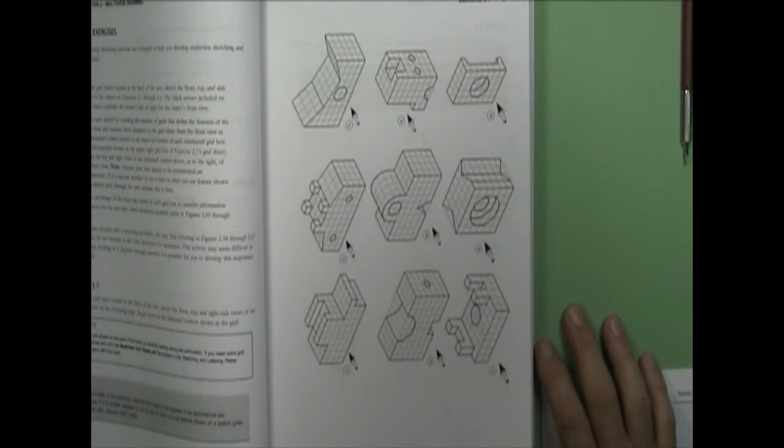Here in the textbook, we're starting exercise 2.1 on page 59, and if you look at these, you've got isometric drawings. The arrowhead tells you the front view. Most of the time, not always, but most of the time, this left face is going to be the front view of our object. It's broken down into grids that correspond to your drawing.

The main warning about the sizes of the grids is when you have an oblique surface, even though it shows 3 grids coming down, those grids are longer than these grids. Okay, they match up here, so you can't just count 3 grids down and then try to angle 3 grids. It's not going to work. You have to count horizontally and vertically to determine the start and the stop point of an angled line when it's in isometric.

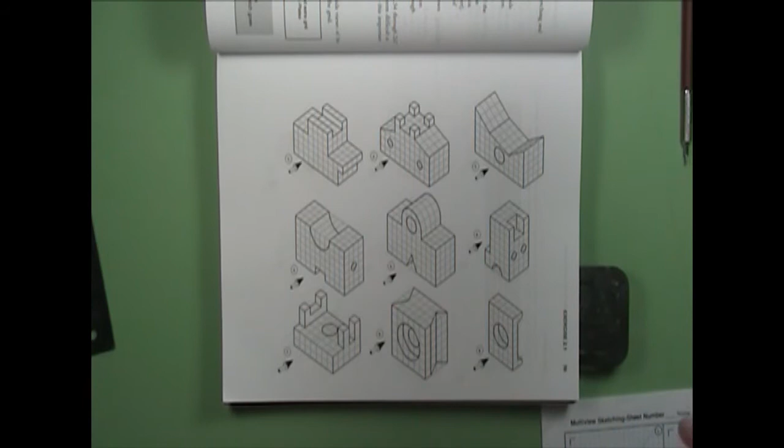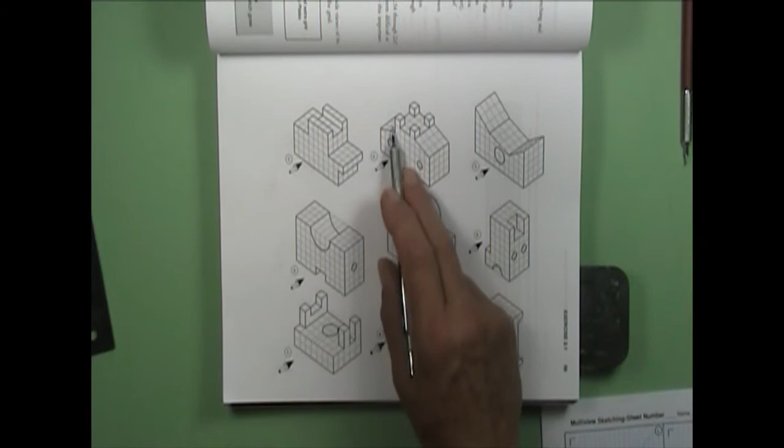Another thing that the book tells you in the little gray box right over here, if it appears symmetrical, assume that it is symmetrical. Okay, like this one here. If we count the blocks, we got 3 to the left of the arc, 3 to the right of the arc, 4 to the left of the notch, 4 to the right of the notch. Okay, symmetrical. This one, however, is not, because this sloped surface here is 4 grids up, whereas this sloped surface is only 3 squares up. Okay, so do some counting and some investigation, and then if it appears symmetrical, it is.

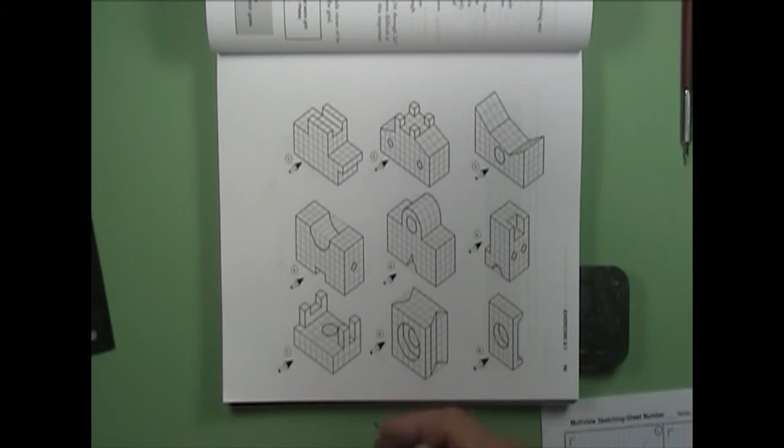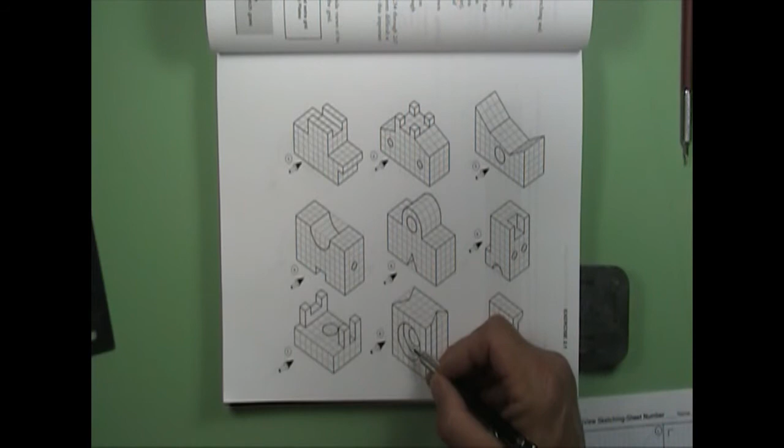If a hole appears to go all the way through, assume that it goes all the way through. Okay, this one is obvious. We've got a front surface and a rear surface. These are not so obvious, but assume that they go all the way through. This one goes through. The one here, this is what we would call a counter bore, in which we have a larger diameter hole that has a depth, and then a smaller diameter hole that goes the rest of the way through.

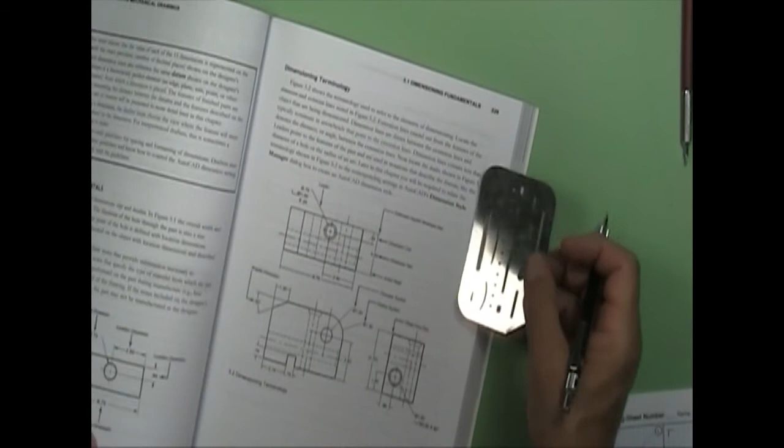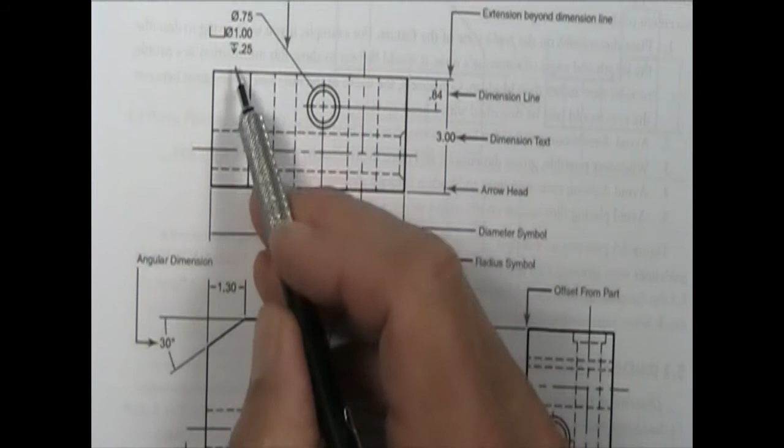If you will flip your book over, page 229, and let me zoom down on that a little bit, okay? Here we have a counter bore hole with the dimensionings here, and the way the dimensions are is the first diameter is the smaller hole that goes all the way through. The second has a counter bore symbol with a diameter, and then a depth for the counter bore. Okay, so this is in plan view looking straight into the hole.

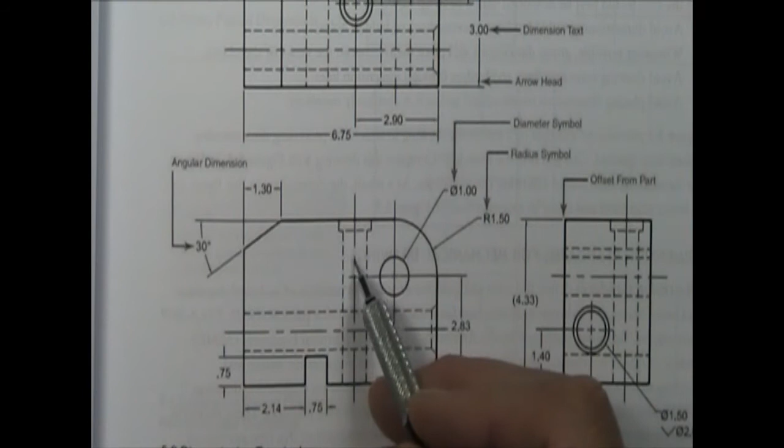If we go to the side view, in this case the front view, in which we see the profile of it, here's our counter bore. It has a diameter of 1 and a depth of 0.25. And then the 0.75 hole goes all the way through. I'm showing you this so you'll understand how the hidden lines should appear. Okay, these hidden lines here will join because those surfaces join in the object. And you got your hidden lines that come down. These do not go all the way up, and these do not go all the way down.

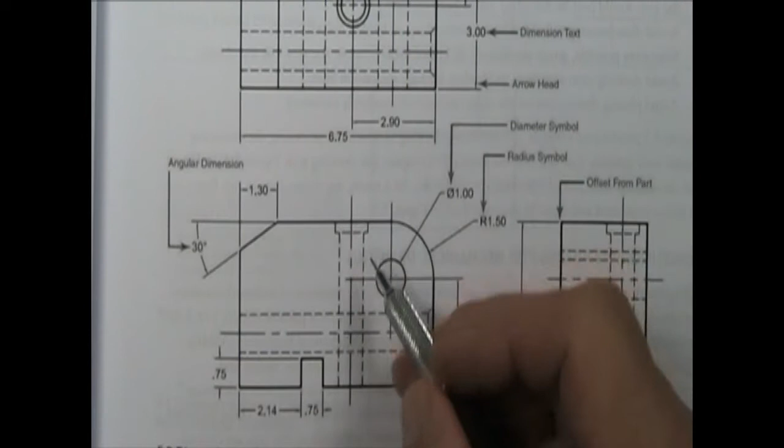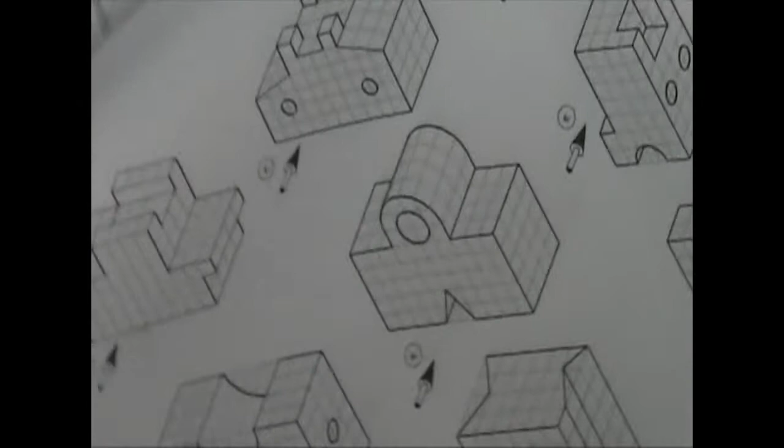So look at the example on page 229 right here for drawing the counter bore. Now don't be confused, because this one is a countersink in which the sides of the hole are angled so that a flathead screw can go into that hole or something along those lines. Okay, so let's go back over here and look. I'll walk you through this one to kind of get you started.

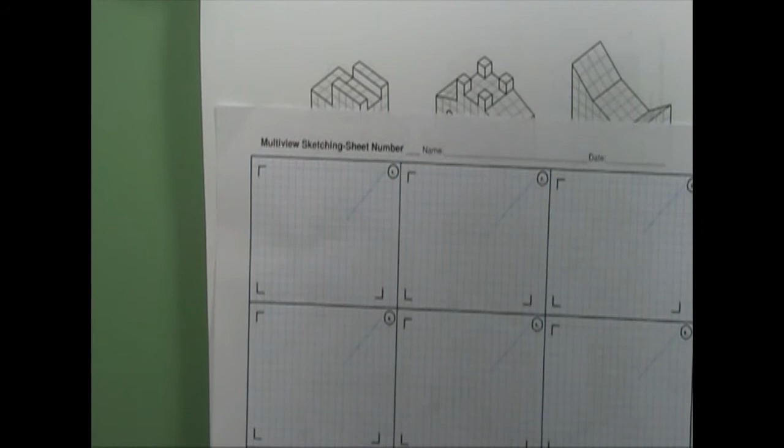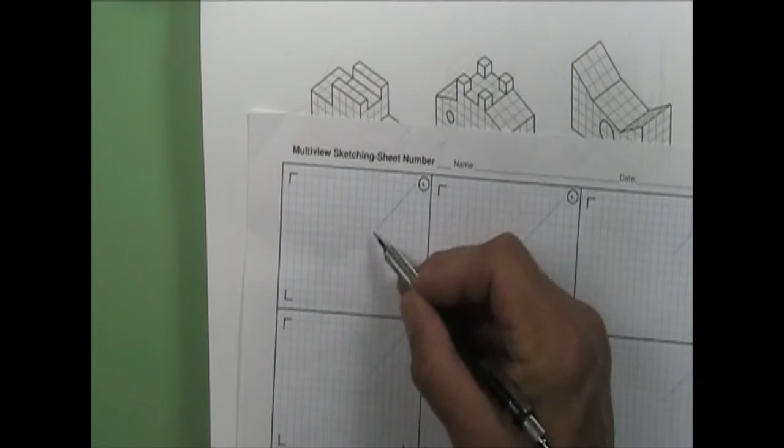Here's your paper that you'll be using, and there's copies of it in the lab. You don't have to tear it out of your book, but it's giving you the starting points for your views. So here's the lower left corner of my front view, upper left corner of my top view, lower right corner of my right side view, and then a 45-degree projection line. Okay, now I would recommend start with a light pencil and then come back in and darken afterwards.

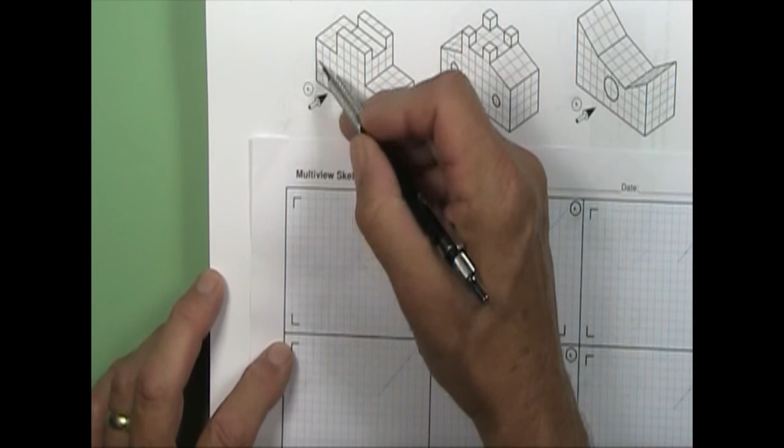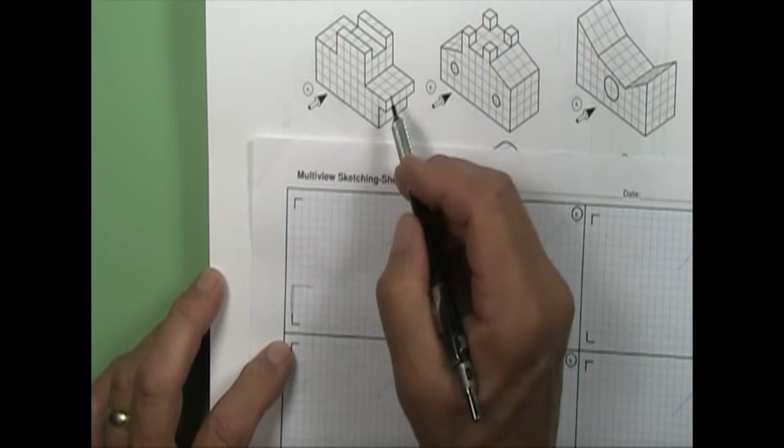But if we look at this, basically you're going to count your squares. And that comes in 3, 4, 5, 6, 7, 8, 9, and then goes up.

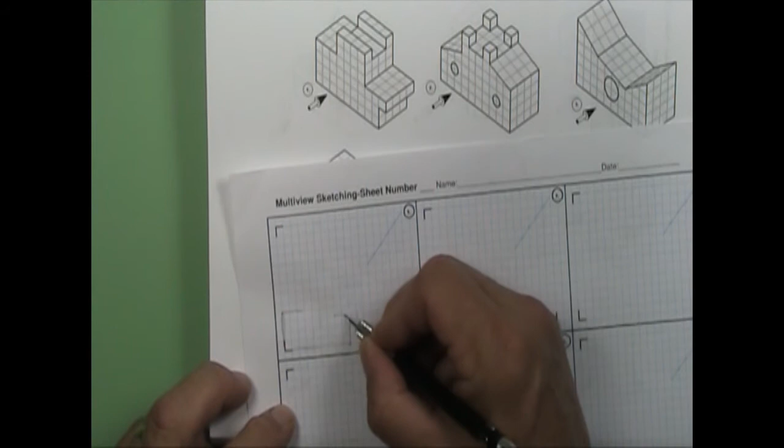It goes up 2, over 1, up 1, back 3, up 3, over 4, back down to there. Okay, so I just roughed in my front view.

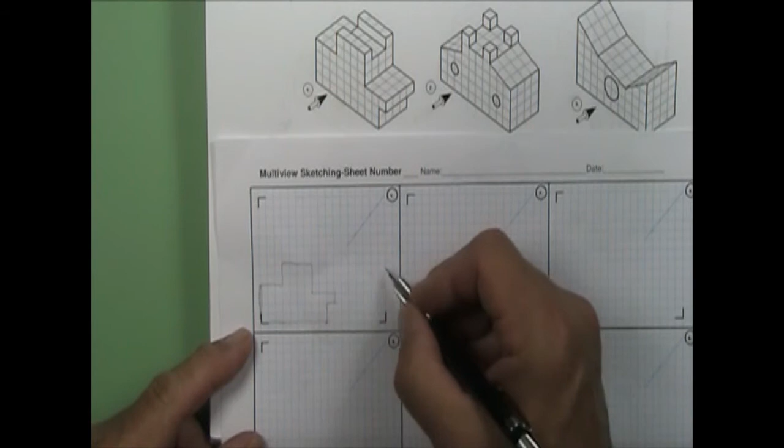If I can take these things and project them over for my side view. So I know I've got a height up here, if I'm looking in this direction for the side view. And you've got to remember, when you're looking straight at the object, all you're seeing are these three planes, and they're stacked on top of each other. You know, if you imagine turning it and looking straight at it. So that's 4 wide.

I know this height comes clear, so I've got a surface right here, so I know I've got a line that comes across. And then I've got this surface, which has a notch taken out of the top of it. Okay, so there's my side view.

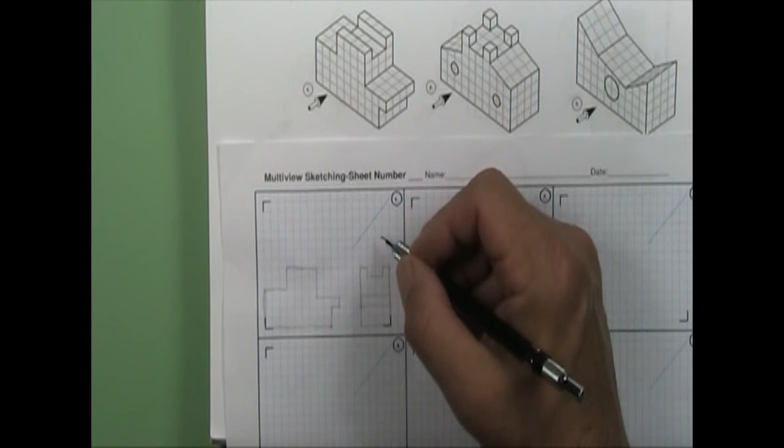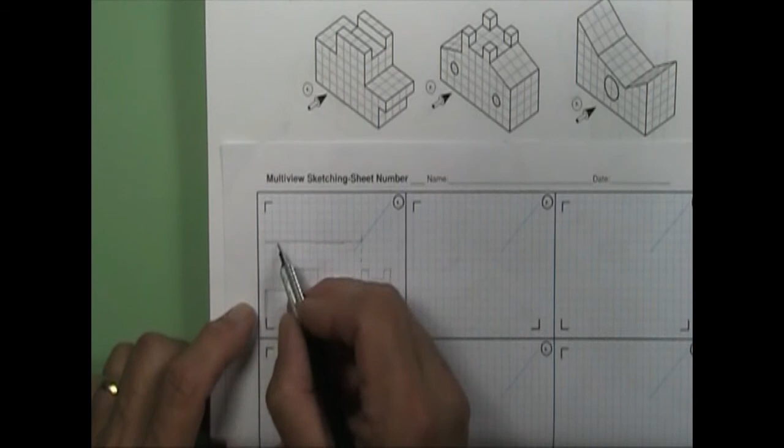If I use my projection lines, and we'll do this sometimes in CAD, and we'll do it in hand drawings later in the semester when you get to using the drawing boards, you just take this and you kind of project up, and then you project across. And so that tells me the edge of my top view is here. So that's the front surface of my top view.

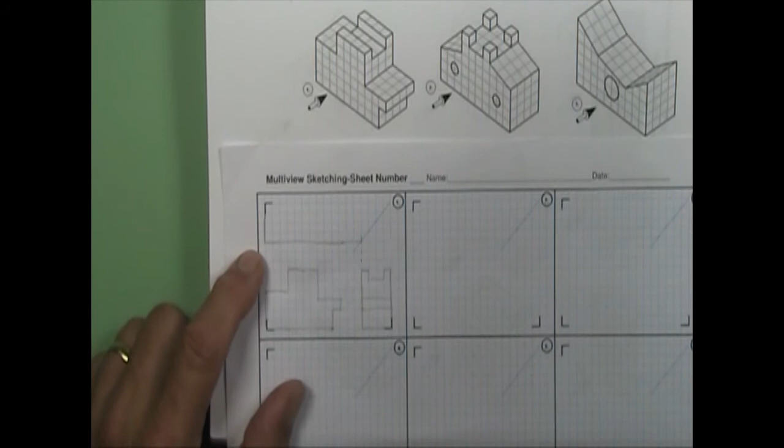Well, you know, if I'm counting, I can count squares, yeah. But anytime you have to measure in a drawing, you're introducing a greater possibility of error. So if you measure it once and you get it right here, and then you can project, it makes it more accurate. And in AutoCAD, it actually makes your drawing quicker, faster. So project up, and then I know that comes across.

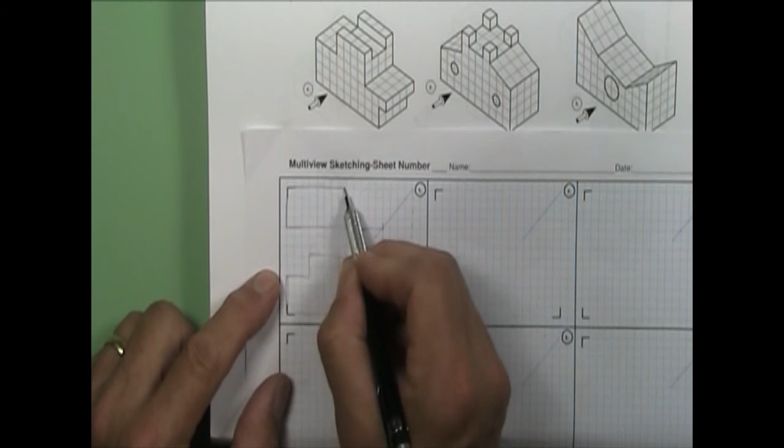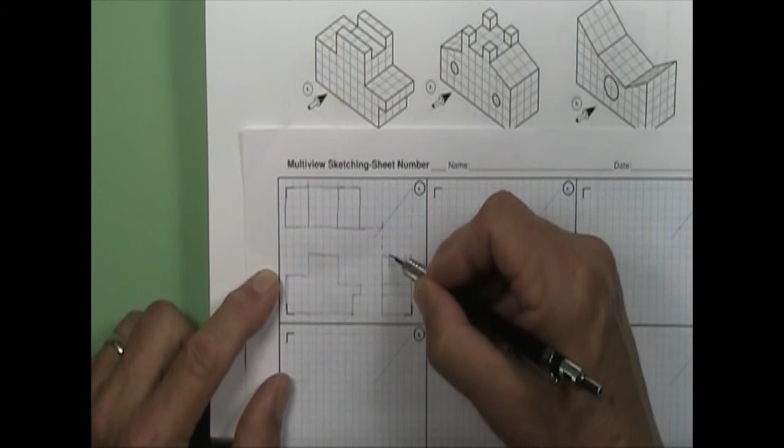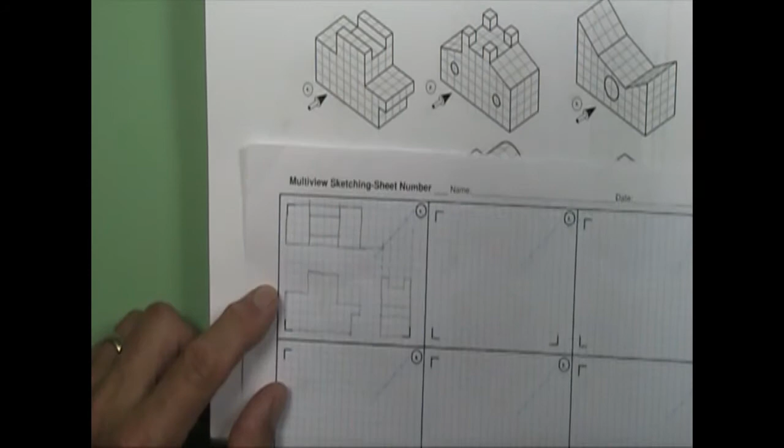From here, I can project up my front view, and that gives me the extent of that. I know I have an object line here. I have another one here. And then I have these for the notch here that projects up 1 square. I project it across, and it's in here. Okay. Now I have not dealt with my hidden lines yet. So let me go ahead and darken.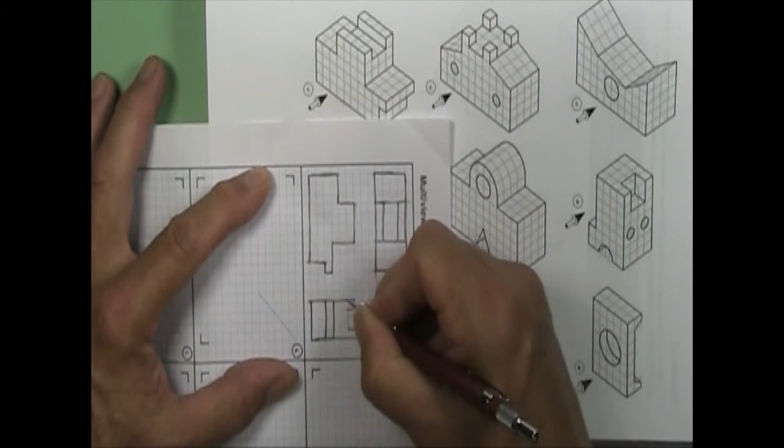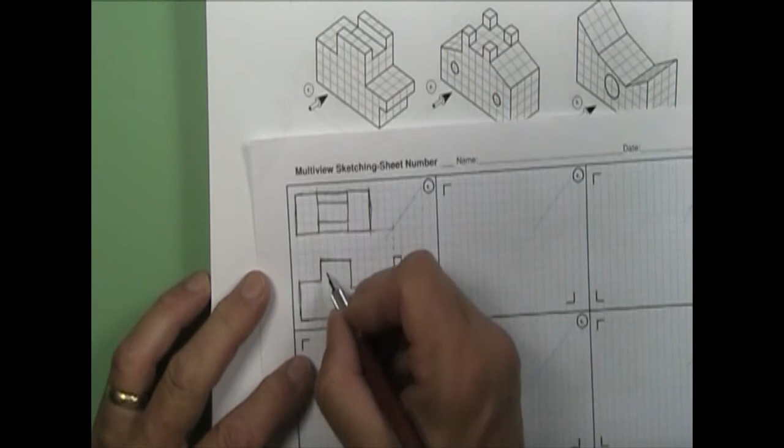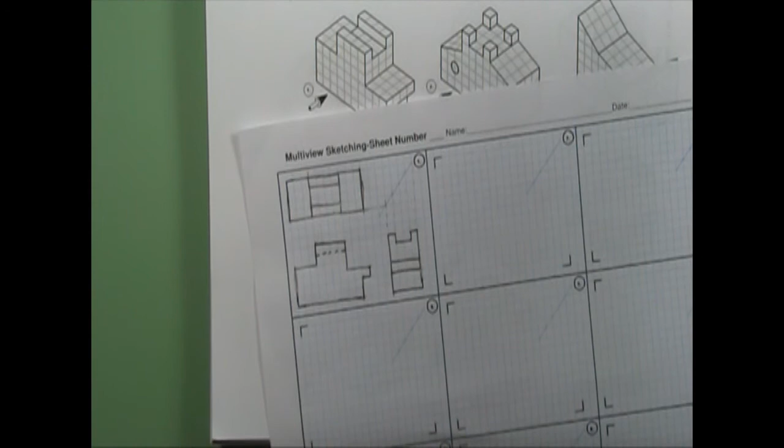Okay, so that's all my object lines. I got them darkened in. Now I've got this little notch right here that when I look at it from the front view, I'll have a hidden line indicating this surface plane. So in my front view, I'm going to have that coming across right here. And hidden lines should be about 1/8 of an inch long with about a 1/16 inch dash. So, about half a square in our case here, maybe a little bit more than half a square.

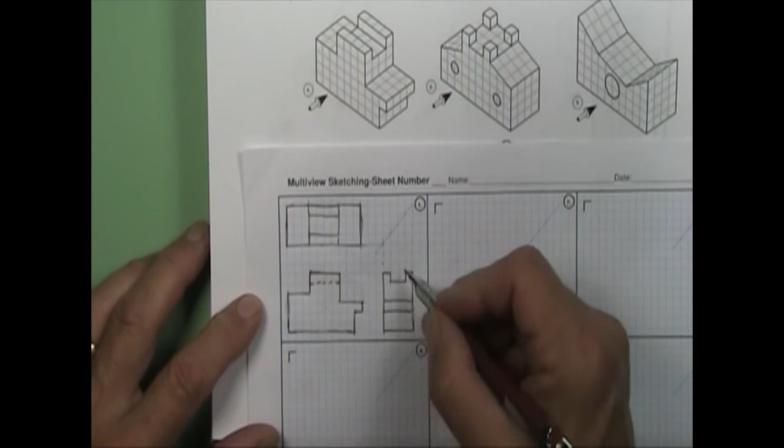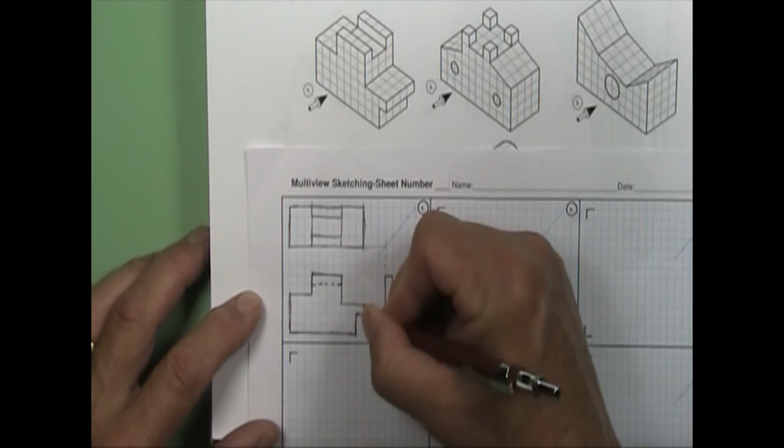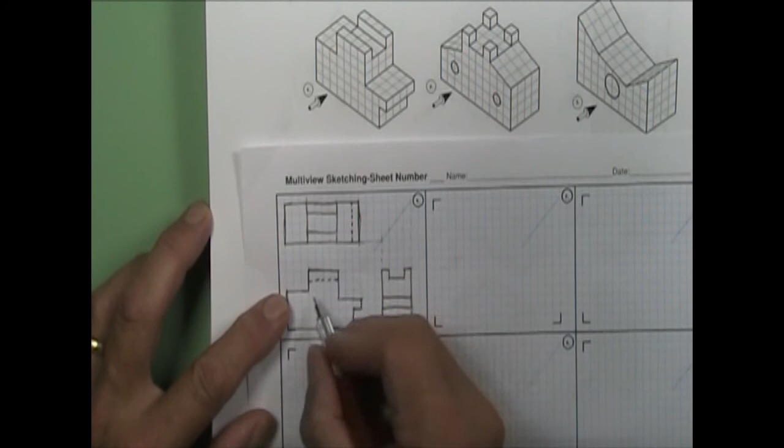In my side view, okay, well, top view, I'm going to have a hidden line here because I've got this surface plane that in my top view I can't see the edge of, but it is there, so I want to indicate that. Okay, and then in my side view, I've got this surface plane, which does not appear in my right side view, so I need to project that across and put that one in. Okay, and so now there's the first object finished up.

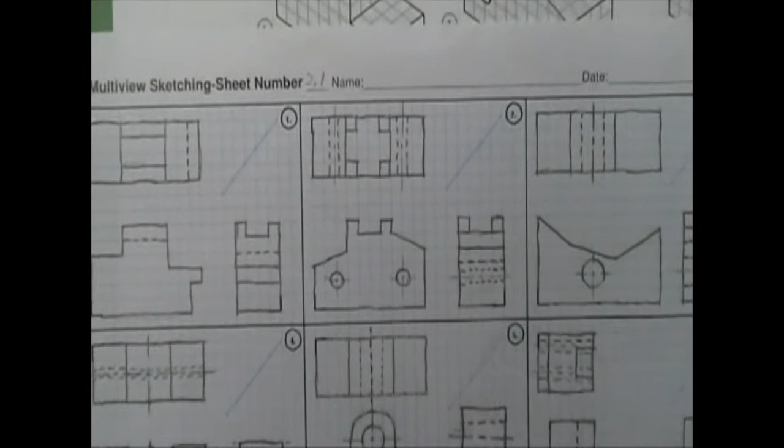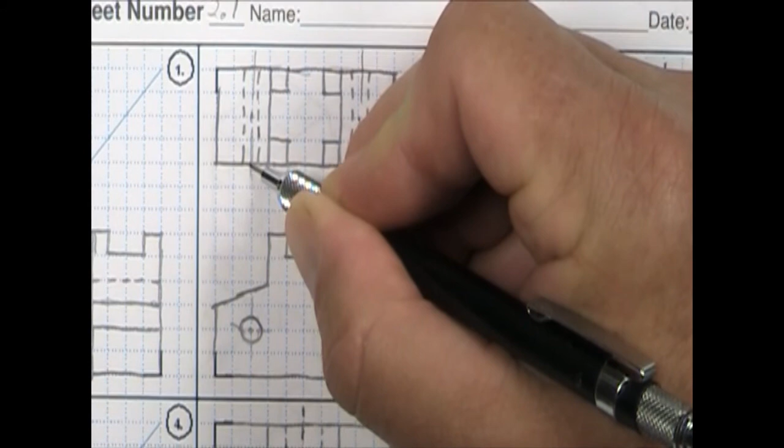Okay, now let's look at, I'm not going to draw all of them for you, but if we look back here, the second one has holes in it. So where we see the circle, we would put a center mark, a little plus in the center, and then center lines that come out. Okay. Where a hole goes through, we do hidden lines for the edges of the hole, and then a center line, no plus in the center, just a line, a dash, and then a line coming out. Okay.

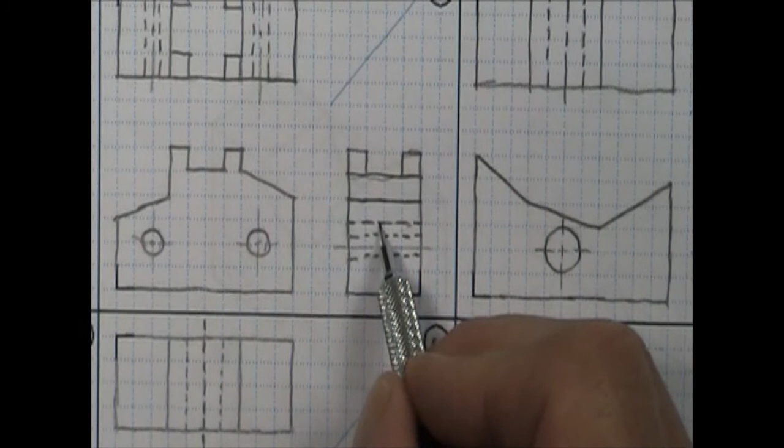Same way in the side view. This one gets a little confusing because we've got the hidden lines for the hole, and we've got a hidden line for this change in plane here and this change in plane, which is under an object line. So we would draw the object line and not show the hidden line. This hidden line would be this edge, and then these two would be for the hole. Okay.

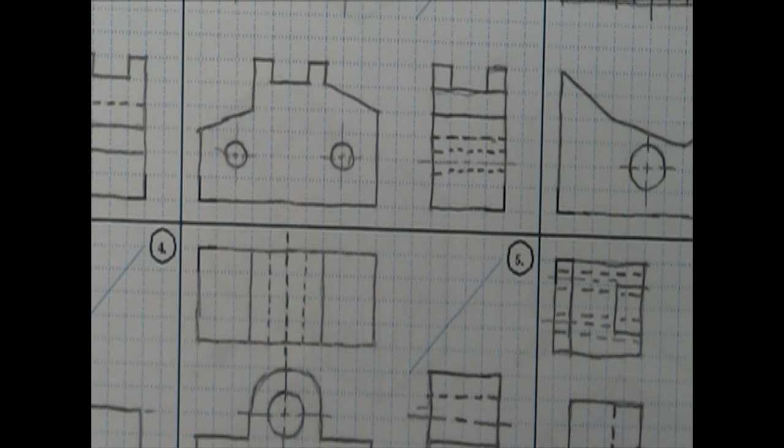You should be able to work your way through all of these. It's a little bit of a practice in sketching how to convey your thoughts on an object. But a big part of it is about how to visualize the object and then transfer from a 3D to a 2D sketch. Okay. If you have questions or problems, ask me or the lab tutors while you're in the lab working on this.